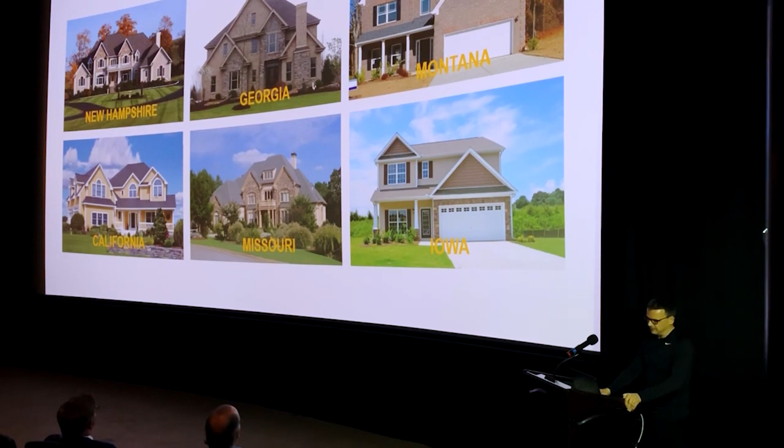So our approach is a bit different from Kenneth Frampton's concept of critical regionalism, which I'm sure a lot of you are familiar with. Critical regionalism arguably looks at context through a geographically pretty broad lens, right?

But we are more interested in the subtle qualities and maybe even idiosyncrasies at the scale of a particular site. It's something that helps us develop an architectural narrative that informs our design process in a quiet, meaningful, and site-specific way.

And tonight I want to show not only pictures of finished projects, but also talk about what inspires us and what guides our creative process when we design our buildings.

What you see here is our first commission, which we called the Camouflage House. Maybe not so subtle a name to describe our conceptual objective here, to make the house assimilate with the landscape and almost disappear in it. We started the design process by documenting colors and textures of the ever-changing foliage of the site, and then transformed them into a compositional palette and template for the building skin.

We collected leaves at the site and used them to build facade study models to start testing the overall aesthetic effects you could achieve, and the idea that you could create a veil for the building that would make it disappear in the context.

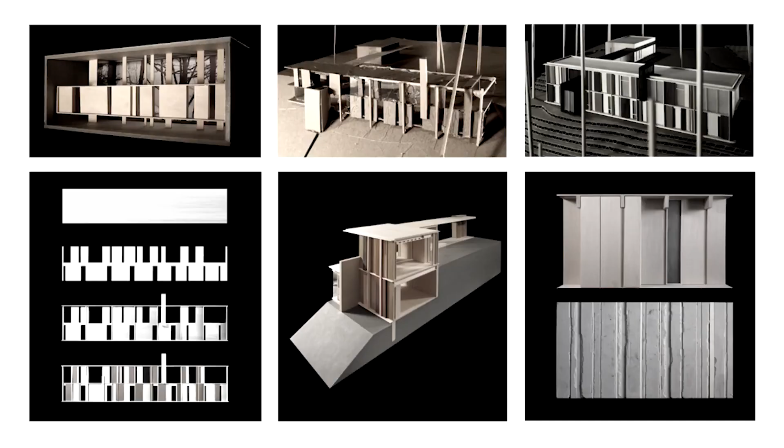One lesson that we learned was the importance of physical analog models at all scales, from highly conceptual artifacts to rip-and-tear study models. You can see here some examples for that particular project, all the way to detailed section models and full-scale mock-ups.

And we found model making to be also an invaluable tool to communicate with our clients, to give them something that is haptic and chronicles our assumptions during the design process and what led us to proposing a certain design.

And so models are really everywhere in our office. Our individual workstations—we are 8 people in my office—each one has a model building station next to it, so there's usually always somebody in the office working on some 3-dimensional object.

The second thing we discovered was the value of architectural diagrams. Diagrams not only to clarify and refine our own design strategies internally, between my partner and I, and then subsequently with people that worked with us, but also to facilitate a more focused discussion with our client about the main ideas driving our design.

So it's not just overwhelming them with pretty images that look awkward to them, but keeping them abreast of what our thought process is.

So let me go through some of our projects to demonstrate how we use models and diagrams as generators for ideas and how the process unfolded in some of these projects.

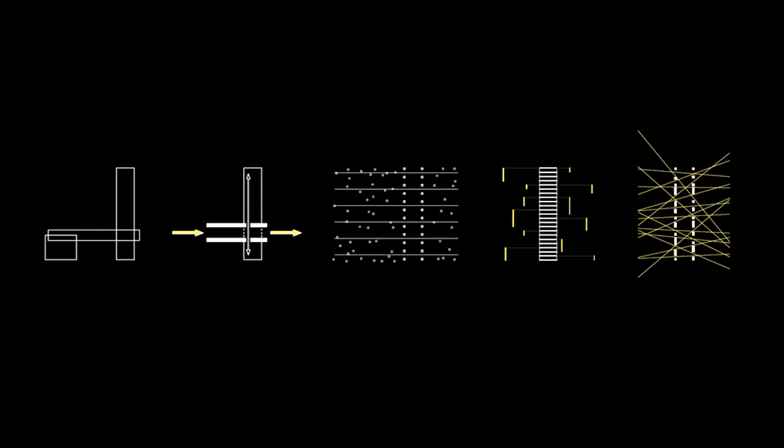For the Topo House, we wanted to explore how a building might merge with the land it occupies, rather than just sitting on it as a self-referential object, right?

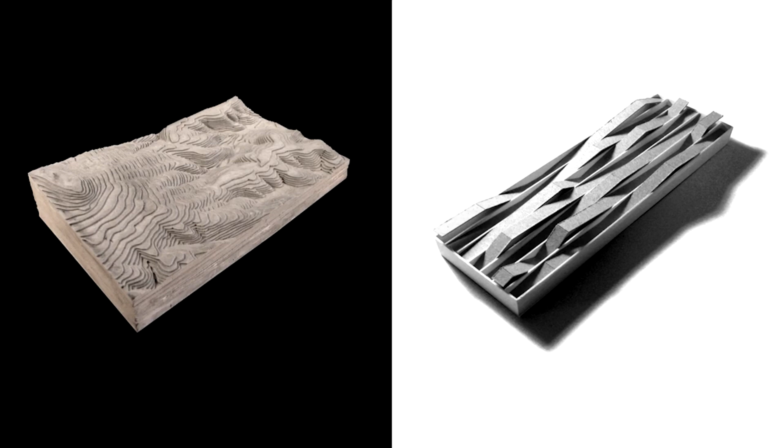The site is located in Wisconsin's so-called driftless region, which is an unglaciated area with softly rolling hills that alternate with tight ravines. And one of our first context models interpreted the distinct experience of moving through this landscape as a series of parallel folding planes. You can see that here on the right.

And we took that model and simplified it into a continuous plane that would peel itself out from the ground, creating formally something like that.

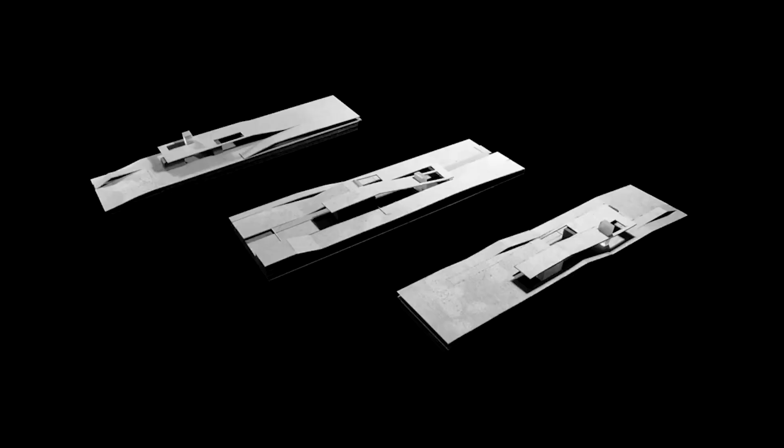And we took that idea and went through a series of rough study models, just really cardboard cut with a knife, that explored possible building forms that could accommodate the given program without getting too hung up on the particularities and exact room sizes of the specific program details.

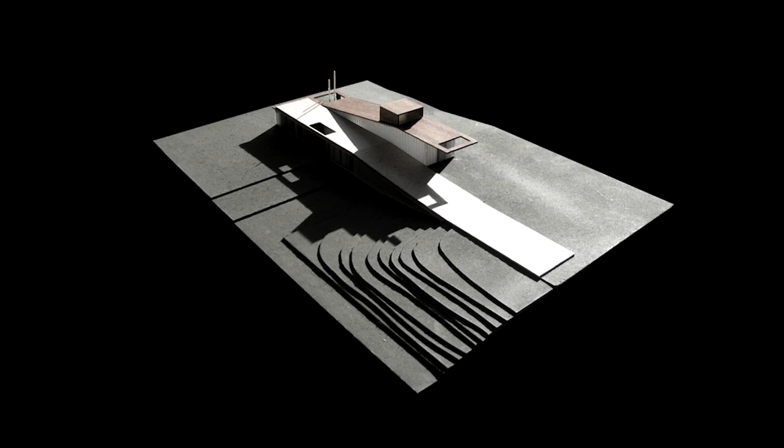At some point, after discarding the more complex forms, we narrowed it down to a volume organized as 2 staggered bars. These 2 bars form a low-slung roof form that extends the grade over to a lower portion of the house and then slowly rises up until it terminates in a long cantilever at the south-facing end of the building.

And then we carved out spaces that became these sheltered outdoor courtyards. We designed that roof band that basically ties these different blocks together, and then added a green carpet—the thing that extends the green prairie land over parts of the house.

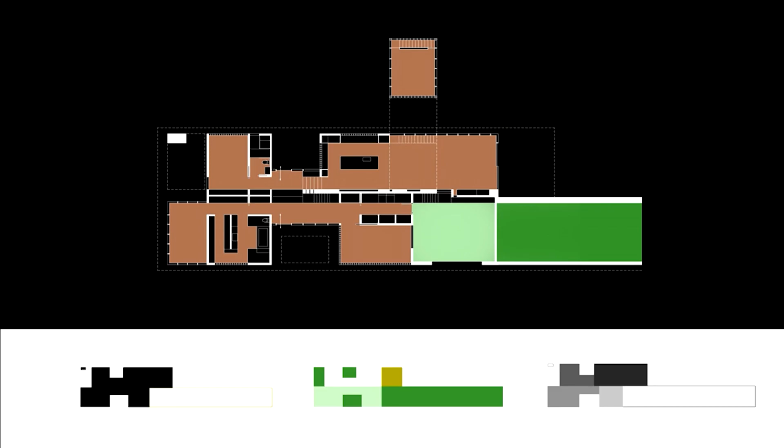The floor plan is really simple. There's basically one central spine that ties together these 4 parts of the house. You come in through this entry courtyard into a vestibule, with a private bedroom here, another bedroom there, and then a main living hall facing south with the big overhang, shown by the dashed line at the end of the building.

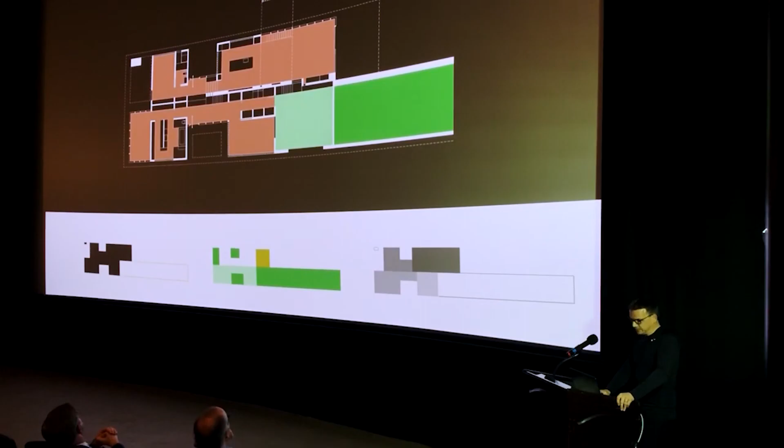In the section model, you can see the different floor elevations in relation to one another on one half of the house. When you approach the house, you see the building literally merging with the grade at one end, then slowly peeling away from the ground and turning into the roof plane that eventually rises further up to the big overhang.

This is a view standing on the lower green roof looking south. You can see on the left where the copper roof plane starts sloping up, and then there's a little observatory popping through the roof plane.

And a view during the winter from the east. So I talked about these voids that we created within the building form—this is that entry courtyard I was talking about.

So you come to the front door. This is the front door here, seen at night. It's a 10-foot wide pivot glass door that opens into that little vestibule.

And then you can see here the first steps that lead up to the next level, if you will—not a full level, but 4 steps or so up to the next floor plate plateau, and then it starts rising up further from there.

And here you are in the kitchen. You can see how those steps, or some other steps here, come down to a lower part. Then when you turn around, you see into the living hall and out into the snowy landscape, as always.

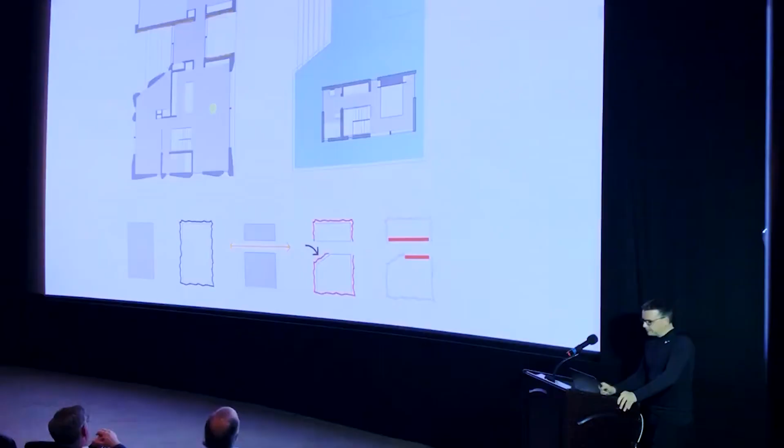We emphasize the entry for the house here by pulling or angling one of the walls in, creating a little entry forecourt with a forced perspective toward the entry door. The plan is again very simple: just a little vestibule and an open living hall, then you go up a set of stairs into a bedroom suite embedded within the green roof of the podium of the house.

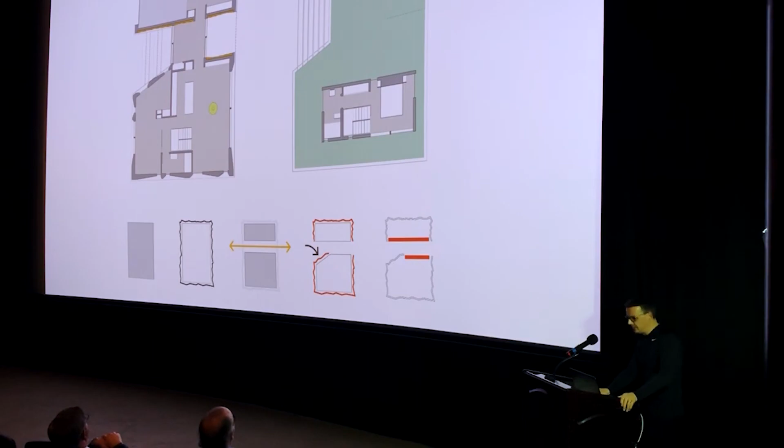This is the view of that entry condition. One side folds in. The other we exposed—or played with the idea of exposure of something else. The skin of the building ends here, and we designed a highly articulated wall of milled and varnished cedar blocks, stacked at slight angles to echo the undulation of the charred wrapper, but at much tighter intervals and in a horizontal way. This wall leads to the entry door and pierces through the building wall. You can see it continues on the inside, and as you walk through, it leads you all the way to the other side of the house with access to a long linear patio along the edge of the woods.

This is a view of the patio, and you see this long retaining wall that double functions as a bench. There's a light fixture built into the underside of this concrete top that emits a soft glow at night. Here's a view back at the house in the evening—you can see the light washing the patio.

Now we have a set of 24-foot wide sliding doors. This is an enormous opening with really cool hardware, very easy to use, and it connects the house—the main space of the house—very generously with that back patio.

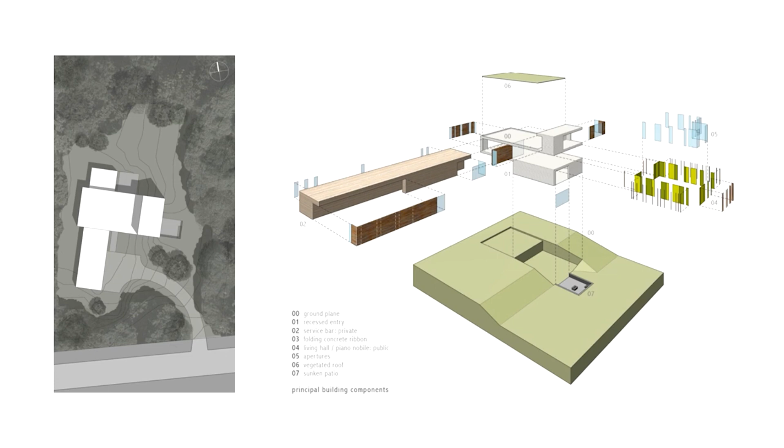We organized the program in two interlocking bars. There's a service bar clad in whitewashed wood, and then a concrete block ribbon that interlocks with it and cradles the main living hall of the house as the social epicenter. That L-shaped configuration allowed us to have a more public forecourt and a private backyard.

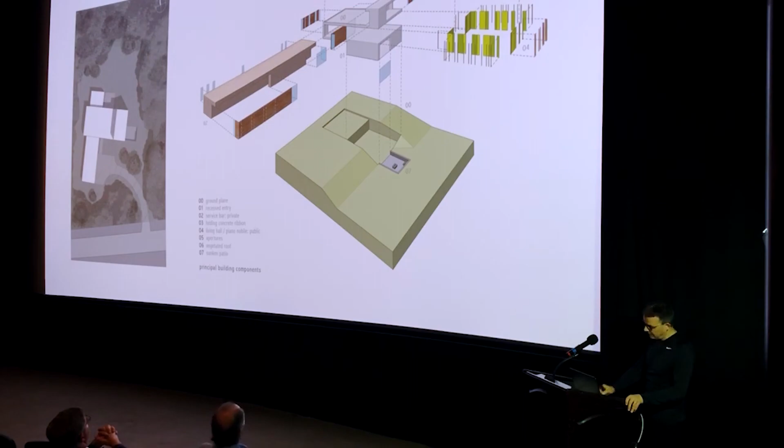That activity hub is really one open space where the owners cook, dine, and lounge together. They hold fundraising events quite frequently, so it needed to be a pretty generously sized space. We wanted to mark that social epicenter of the house with these perimeter wall panels.

We used shades of green to contrast with the rest of the muted colors of the house. It creates this almost piano nobile, if you will—a colorful volume bracketed top and bottom within that white concrete block form, which folds up and creates a sort of observatory on the third floor.

Now, why green? In our discussions with the client, it became clear that one thing they really regretted about living in Wisconsin was the short duration of the summer. So we proposed to use color as an architectural device to infuse the interior year-round with the lush tones of summer's verdant but short-lived greenery.

We used this diagram to illustrate the idea. As Wisconsin's long winter sets in, the lush green turns into gray—this is where we are right now, still—until we artificially reintroduce green to the color palette, like an abstract and maybe cheerful echo of nature's chromatic vibrancy. The idea was that this splash of color would act as a potent antidote against the effects of those long, protracted winter months when the actual apertures of the house frame nothing but somber views into Wisconsin's frozen landscape.

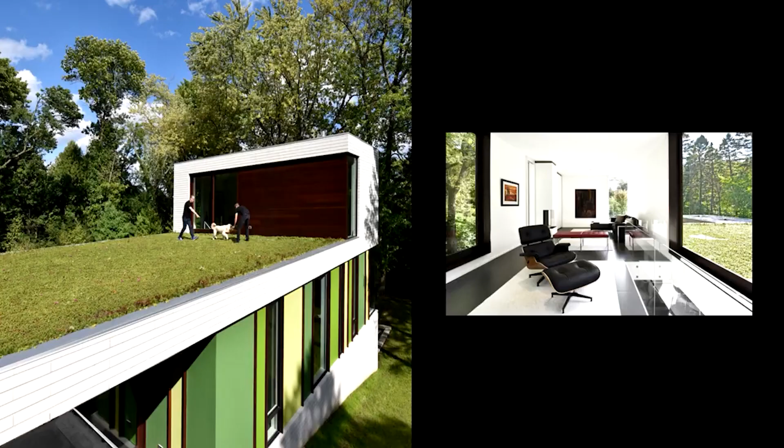There's a staircase that leads up to the small study on the third floor. That study opens up to a green roof, which you can tell does not have any railings. So by code, it's not supposed to be used, but the dog discovered it as its most desirable space in the house. So it has become occupied, and we just hope that nothing will ever happen.

It was funny because at the photo shoot, the photographer attracted the dog, which started running toward the photographer who was standing on the garage. There was a moment where it seemed the dog would just fly off the roof. But it didn't happen. They're smarter than we think.

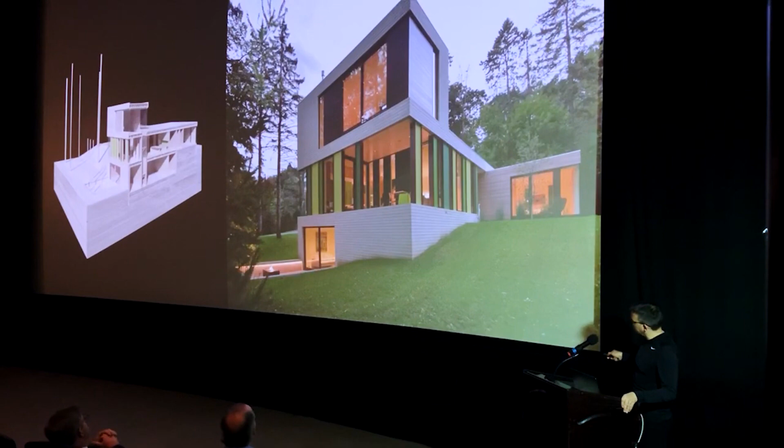And there's a view from the backyard here. This is the master suite, and then you can see here that sunken courtyard with a little fireplace. This is where guests can sleep, and a view from the master bedroom back to the house, with a little private terrace there.

Sometimes projects can be inspired by nothing more than a random encounter at a site visit, which is what happened when we designed a small studio for a country music composer, also in Wisconsin. We came across this old manure spreader that was left behind on an abandoned field across the street from our site. I'm not sure if it was the complementary colors or just the image of this lonely, weathered object or artifact sitting alone in the field, as a sort of memento of the area's agricultural past.

But something intrigued us really about that, and it intuitively seemed like an interesting and fitting precedent for this kind of project - this primitive building in the middle of the countryside.

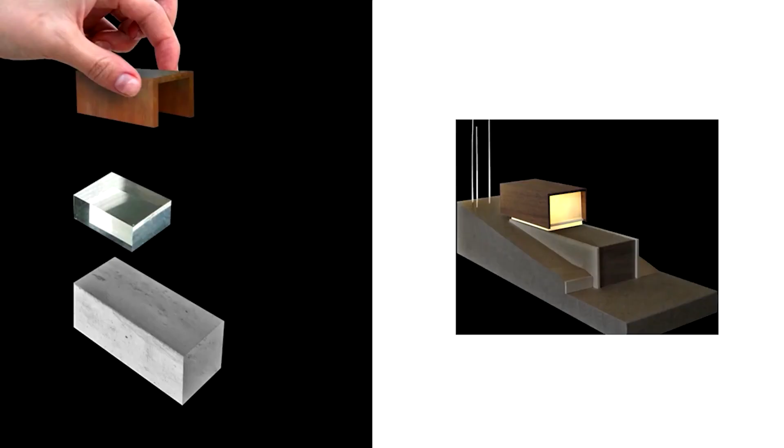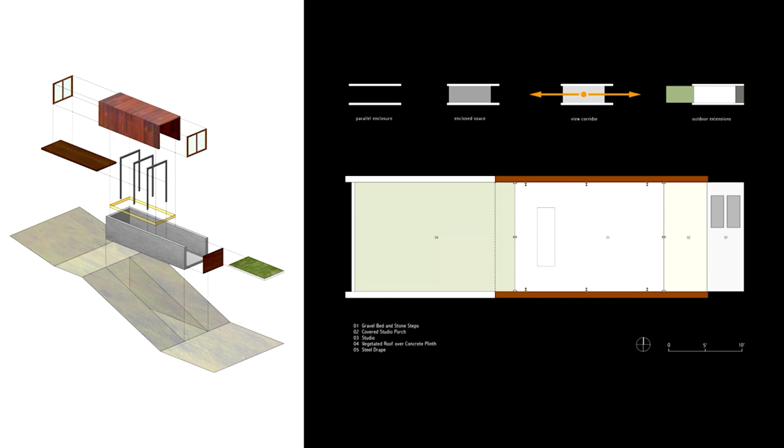So we developed a very simple building volume that consisted of three basic components: a concrete base, the open studio piece itself, and then a steel shroud that laps over that studio space. The concrete podium carves into the slope of the site, and then formally supports that studio space above, and then the long sides of that studio space are covered by the steel shroud that folds over the top.

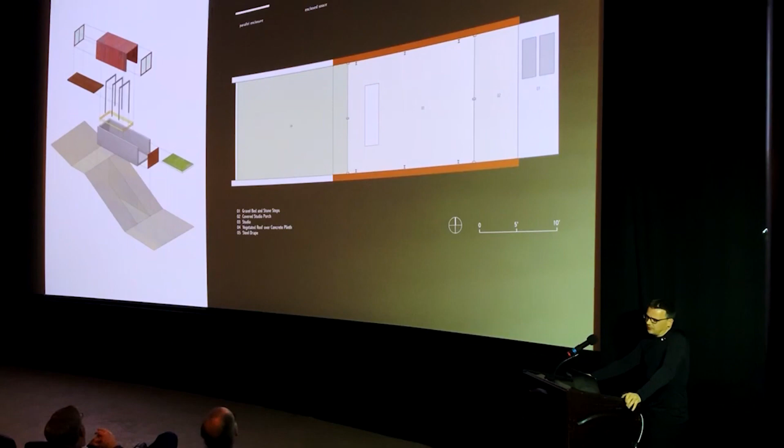And the rusted manure spreader had served as a starting point, and maybe a little bit too literal, but so be it. That idea of weathered steel plate was an obvious and appropriate material to start talking about an enclosure system here.

So instead of cleaning the Cor-Ten steel before installing it, which is best practice, we decided to keep all the alloy imperfections and surface oils and roller marks from the steel mill untreated, to create a really unpredictable and ever-changing veneer that would contrast with the modularity of the cladding and the formal rigor of the building itself.

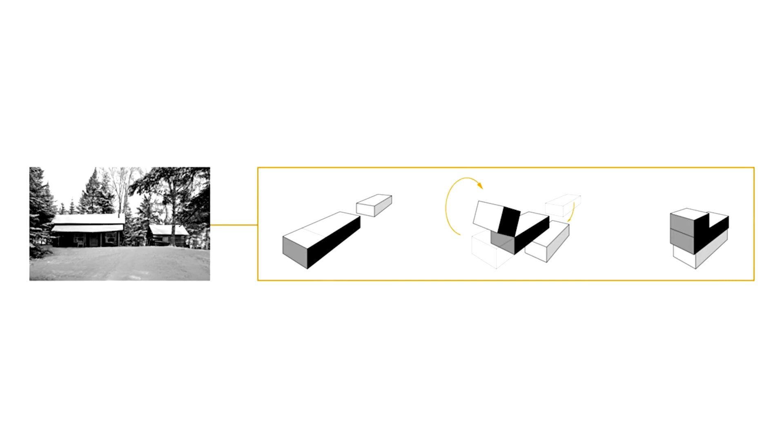One example is a pair of cabins I want to show, the stacked cabin and the linear cabin, in which we both revisited the traditional typology of Wisconsin cabin compounds, which usually consist of an open plan longhouse that houses the communal living spaces, and then an outhouse and a freestanding tool shed.

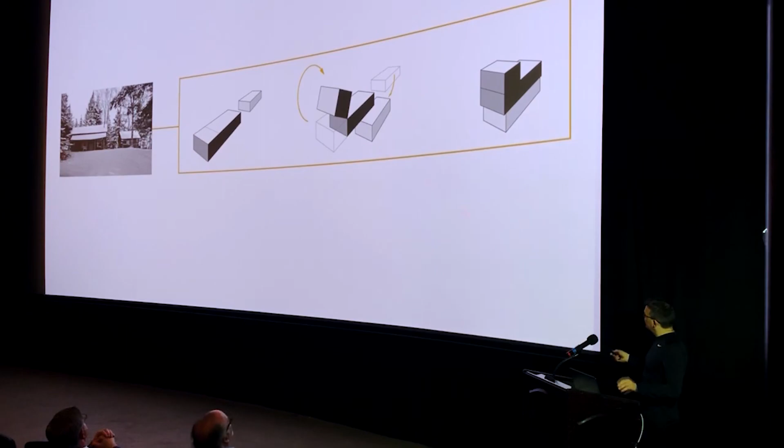For the stacked cabin, we tried to take those components that are usually horizontally organized and stack them vertically, which allowed us to minimize the building's footprint and take advantage of the sloped site and the views into the treetops that a higher vantage would afford. So that's the stacked cabin, a really simple building.

And the linear cabin was designed a few years after that. In this project, we tried to express the program pieces as 3 seemingly autonomous volumes. We started out with a compact mass for the entire program, like in some previous projects, and then pulled pieces apart, a storage component and a living component, and the sleeping component, like the hearth room component and the sleeping component, pulled apart and then unified by a roof plane.

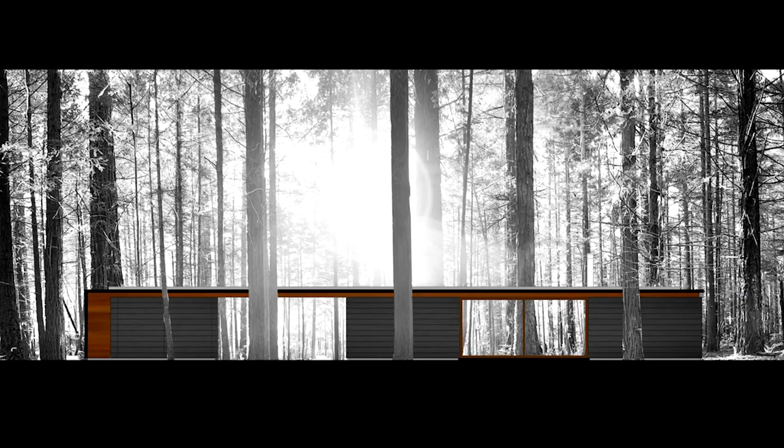So the building appears as a simple bar building when you approach it from the gravel drive that weaves through the forest, and then you look through the voids to the landscape on the other side of the building.

So there are 2 voids. One is this one here, which is really a covered outdoor space that you can use for barbecuing, et cetera, but also to park a car if necessary when the weather is bad. This is the tool shed, but also storage for a canoe and some outdoor equipment.

And then the other void in the building is basically a glass enclosure on 2 sides of that hearth room. There's a galley kitchen here, and then a wood-burning stove in the middle, a little dining space. And then you have access to the 2 sleeping quarters on either side, very small bedrooms. One is a bunk bed room, and the other one is for the parents.

And we cladded that in knotty pine to create a level of rusticity that contrasts with the clarity of the form itself.

Anyway, of course, context is not always pristine and awe-inspiring nature. So I wanted to show this project, which we called the Redaction House, because the surrounding here was much less accommodating than the bucolic and pristine settings that I've shown so far.

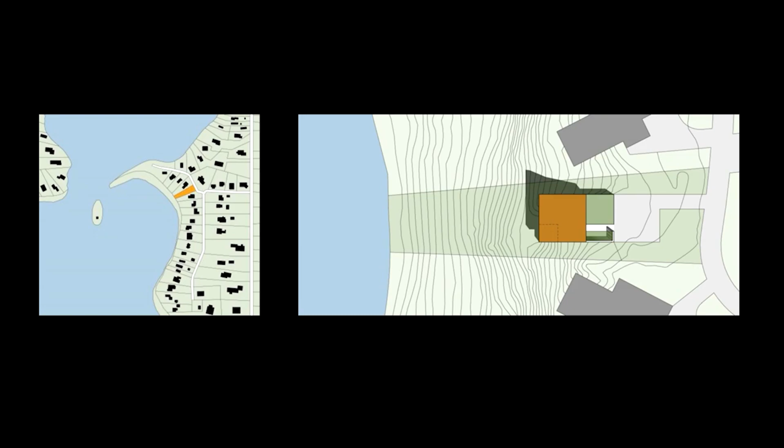The building sits on a tight sliver of land in the Milwaukee suburbs. It's really part of a necklace of decidedly prosaic suburban spec homes that crowd the shoreline. You can kind of see the tight fit here.

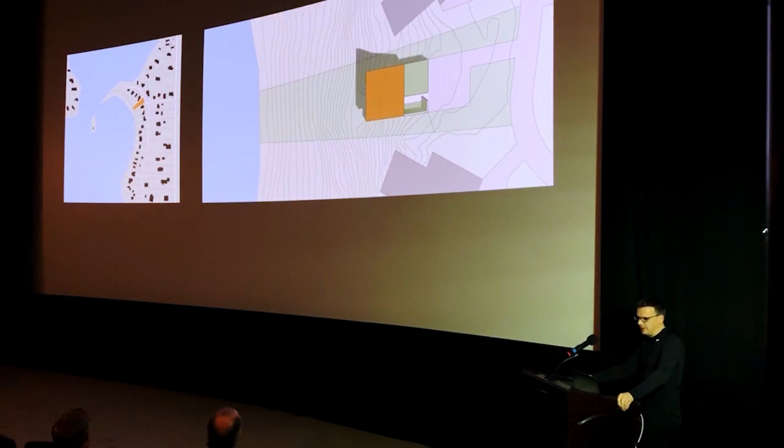The site offered one small view corridor of the lake, right around here. But as you looked sideways or turned around, you would be overwhelmed by the prototypical and uninspired built-up context of suburbia.

So in a way, this project became an exercise in context avoidance, if you will. And it compelled us to design an introvert building that could basically function as an optic filter that would frame the desirable views and block out those that were not that desirable.

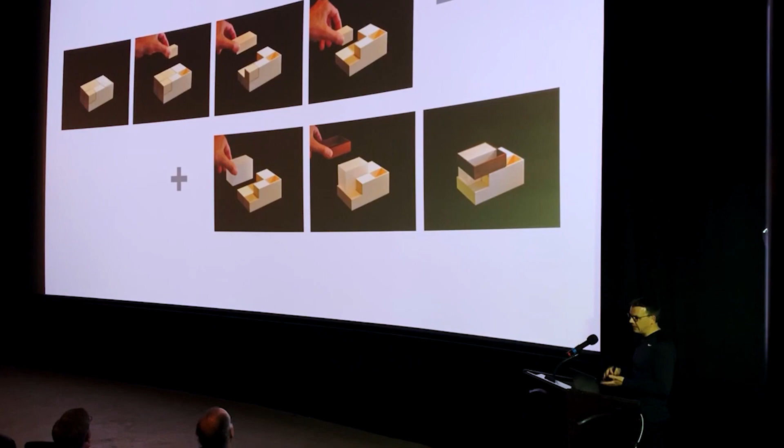The idea of introversion affected the formal evolution of this house, which is based on a series of simple volumetric reductions, and then the bottom row shows subsequent additions to the volume, which led to a sort of fragmented cube with spatial voids that organize the program inside and aid us in that reductionary process.

I made that up, right? That sometimes works, but anyway, we basically ended up with a brick volume that interlocks with a wood cube.

Anyway, this is a pretty cool graphic because you would see these white blocks blocking this out, creating a pattern not unlike what you're seeing here, which basically informed or started the design process for facades, for the compositional palette for that part of the house. That's really unfortunate—it's sort of like a highlight of the whole lecture.

All right, so the next project is one that we just recently completed. This is still a residential project, but I want to change the scale a little bit. It's a 6-unit residential development designed for a vacant urban lot in Oak Park in Sacramento, California.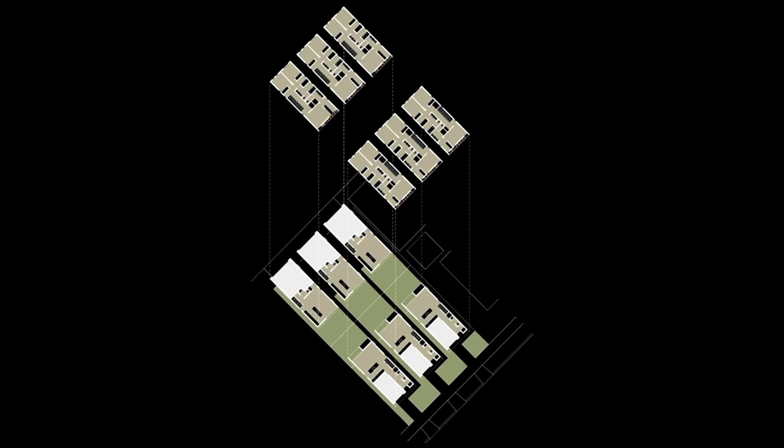This was a spec development, and we had to work with very tight margins, so the design had to be extremely efficient and simple. We organized the units as a compact cluster of 6 individual 2-story homes that mirror the massing and scale of the area's existing building stock around.

Each building is articulated as a plinth with a complementary volume that starts at the back and then wraps over and cantilevers over the front to create a sheltered entry condition.

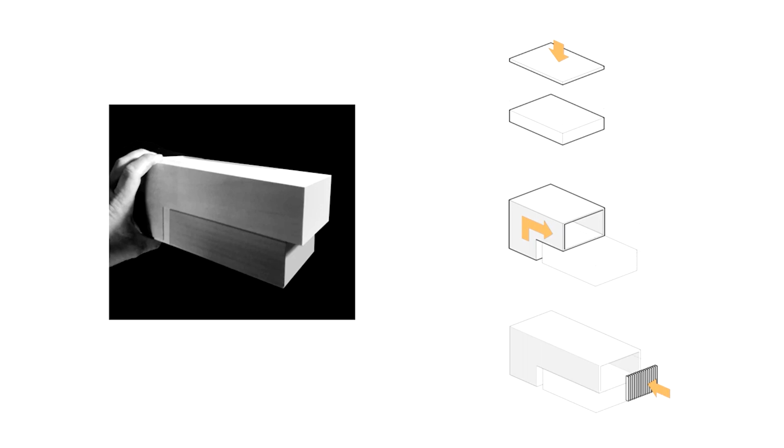We realized really early on that the cantilever and the visible face of that cantilever was really going to be the principal facade for each of these buildings, because budget was tight and we knew that we had to allocate our resources very carefully.

But let me take a step back. Like so many other urban neighborhoods in cities around America, Oak Park for decades experienced the effects of urban flight and economic disinvestment, and only in recent years has been rediscovered by students, young professionals, and artists as an affordable community close to downtown Sacramento.

I know that sounds like just the classic gentrification process, but it's a little more subtle there, a little more honest in a way. I think it hasn't really created an influx of high luxury condos, but it is happening at a moderate level, and it is good for the community.

It's very diverse, both economically and racially, and the idea or the effect of people moving back to the neighborhoods, of redeveloping even existing homes, is quite healthy there.

Anyway, with the influx of new people came small art galleries, independent coffee shops, family businesses that are now starting to fill abandoned storefronts, and so on and so forth. And then there's a whole scene of large-scale murals that have transformed drab warehouses, some of them vacant, into multicolored canvases, and old houses in the neighborhood being repainted in bright colors.

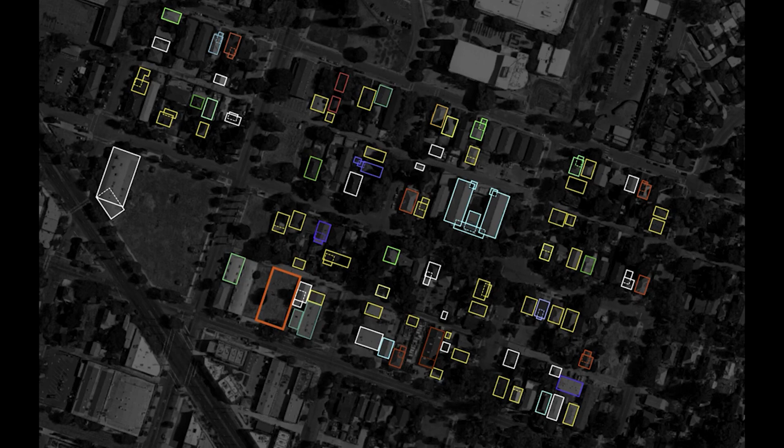This intrigued us right away, and so it happened that color became here an obsession. You will see, maybe not with some of these projects I'm showing here, but when you look at some of our other work on our website, color has become an important element in our design process, because we feel it is an easy tool, an easy application to create a reference to a site, and is also very cost effective.

So we have now studied color theory quite a bit to see how we can apply some of these rules into our own design. When we first visited the site, we drew a color-coded map of the surrounding buildings, and made this large collage in which we paired pictures of surrounding homes with vertical color bars that we felt best complemented the respective paint schemes of the buildings.

And these vertical bars actually reminded us of color pencils in a box, right? Which in turn became the inspiration for the main and defining element of the home: that south-facing facade of the cantilever. When we took these pencils and spaced them out a little bit, we realized it really started looking like a template for something like a screen wall—basically a series of vertical facade louvers that together could serve as a brise-soleil and also give the building an immediate recognizable identity. And this is exactly what we ended up doing.

The front facade of that cantilever basically frames an infill of colored aluminum louvers with prismatic colors that juxtapose the home's otherwise muted and straightforward material palette.

Here's a view in the evening, and you can see how the building turns into a sort of playful addition along the street. And a view during the day. Close-up view of the facade louvers.

It was actually interesting—we detailed this completely different, and it became a cost issue, as so much good ideas seem to cost money. But we were fortunate enough: there is still a car repair shop a block away, and they ended up fabricating these. They bent sheet metal and painted them in their paint shop on site, for a fraction of the cost compared to how we originally had detailed these as extruded aluminum custom profiles.

All right, I know that I'm 50 minutes in here, and I know that Nate is going to kill me if I run late here. So there's one more project I'm going to show, and I'll let you go.

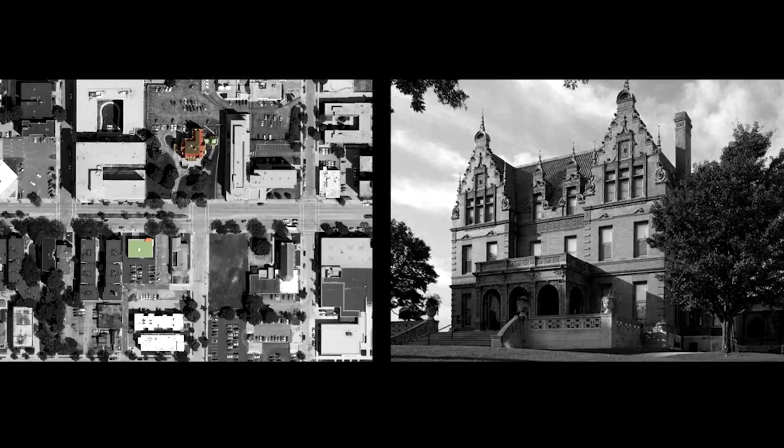Pabst doesn't exist anymore, but there's an organization that runs the historic Pabst Mansion House Museum, a fantastic 37-room villa that Frederick Pabst, the founder of Pabst Brewing, built for himself in the early 1890s. That organization asked us to design the visitor center and archives for the museum. The Pabst Mansion is one of the most frequented house museums in North America. If you're ever in Milwaukee, not only stop by our office, but you should really go there, because if you have any interest in architecture, this is an incredible building.

In today's dollars, it cost $60 million to build. Maybe that's not a lot in Dallas today with the oil money, but it's a lot of money within the confines of Wisconsin.

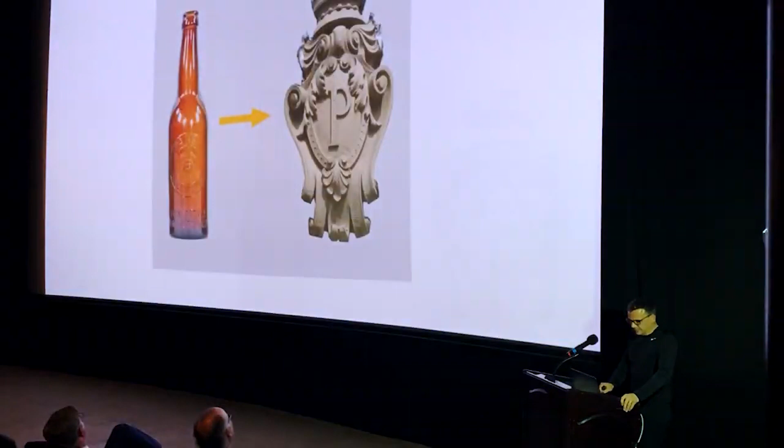Just a little side topic here. One thing that amazed us when we started our research for the project was this: the sale of beer could actually yield enough money for someone to build himself a castle-like building, at the scale that only nobility would have been able to afford in 19th century Europe, which is the time this was built. We actually looked at the overall profit of the Pabst Brewing Company in 1890 to calculate how much profit they made per bottle.

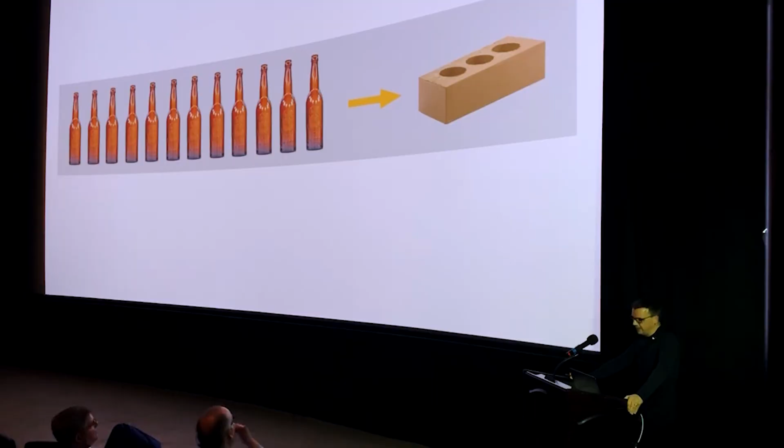Which was 0.27 cents. That is calculated by using the overall volume that they brewed, and then dividing it by the content of one bottle. Because a lot of the beer was, of course, tapped in buildings like the tied house that our office is in. We then researched the average cost of one brick during the same time, and calculated it took the equivalent of selling 12 bottles of beer to pay for one brick, which was 3.25 cents. And when you look at the mansion and those gigantic solid walls of brick, you can only imagine the amount of beer that must have been consumed to finance that place.

This all has nothing to do with the project, by the way. I just thought I would share that with you, because we spent a lot of time on the math, if you can imagine.

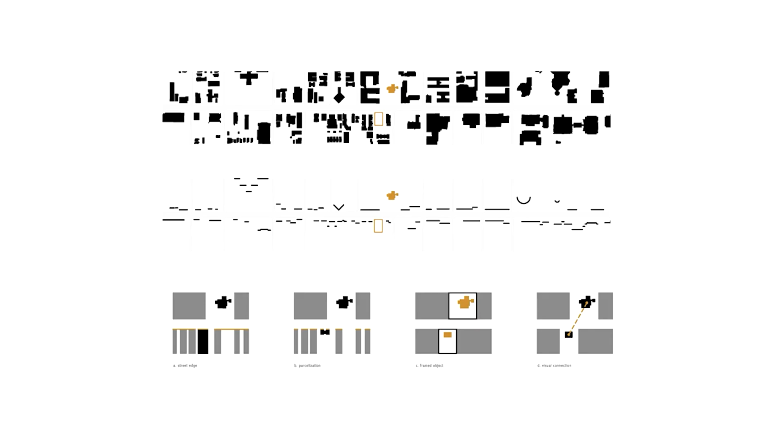Anyway, this is the mansion, and it used to be part of a necklace of grand mansions built by the industrial captains of the time. This is actually Wisconsin Avenue now. It was called Grand Avenue and goes all the way to the lake through downtown. This is really the only mansion left. It was going to be destroyed in 1970, but then was bought by the organization to save it.

Marquette University is right around here. You can kind of see, just like the Nolli plan of the area shows, these solid footprints of the buildings encroaching on this site. Now it looks tiny, right? It was still a big Pabst mansion. But the funny thing is, the site did not really provide enough space for that visitor center without encroaching on the view of the building itself.

So the organization bought this lot here across the street. But it's not only not on the site, it's also not right across the street — it's sort of on an angle. And I think one of the struggles we had was to figure out a way these two buildings could actually relate, so people would understand to go to this building and start their tour here, and then their guide would walk them over to the mansion.

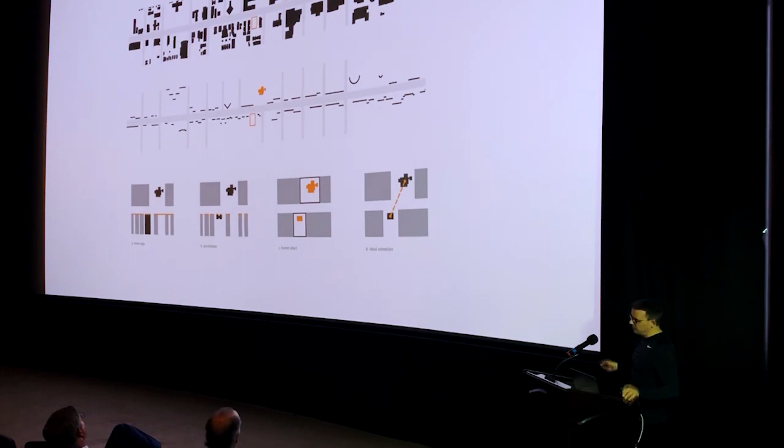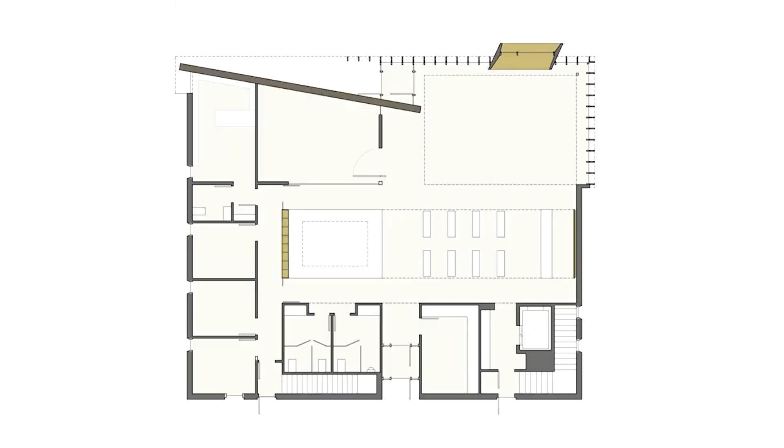So this is really just basically a square building with one wall that sort of angles toward the entry vestibule here and leads you into an open space that can be used for visitors to congregate before their tour starts, but also for events like weddings and so on and so forth.

And then there's a little store here. Actually, these are all going to be fixtures that can be moved out to make a larger event space, and a little exhibit space over here, offices and back of house stuff there.

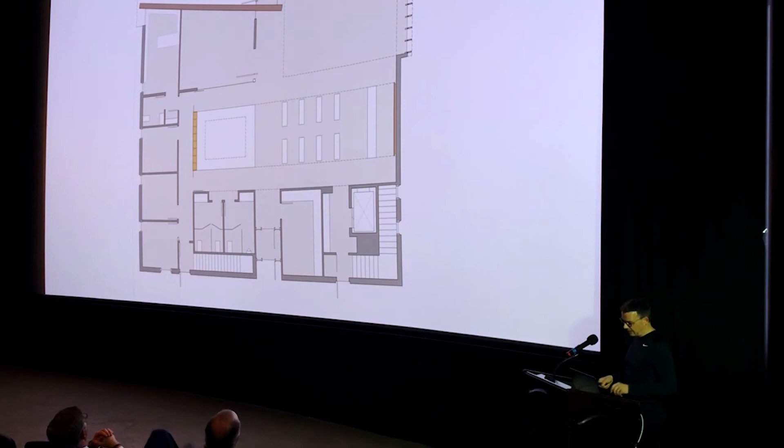And then there's actually a whole classroom cluster in the basement. But the basement is mainly occupied by the archives, which you can see from the main level by looking into this atrium down, and you will see there the archivists working through their materials and sorting things and so on. Again, just the massing, very simple here.

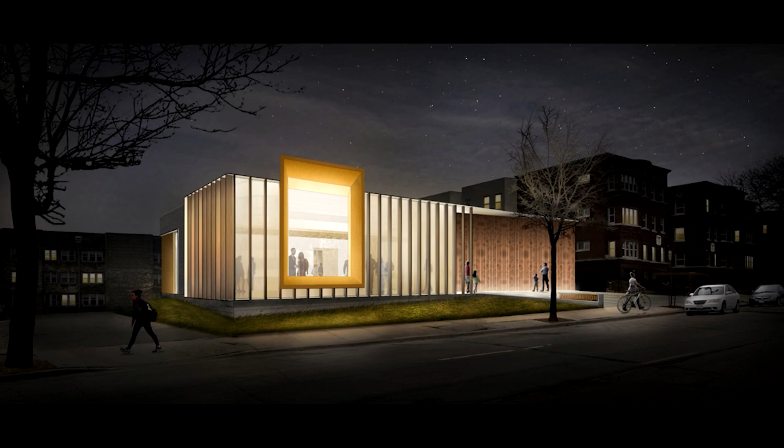You see here that angled wall that sort of opens up the entry and a view from the street, from across the street.

This is all going to be clad in polycarbonate glazing, triple wall system that actually has a very good R value compared to glass. And then, sort of complemented by these very tall vertical fins that give the building a sense of monumentality that we feel befits its purpose in relationship and dialogue with that grand monumental mansion across the street.

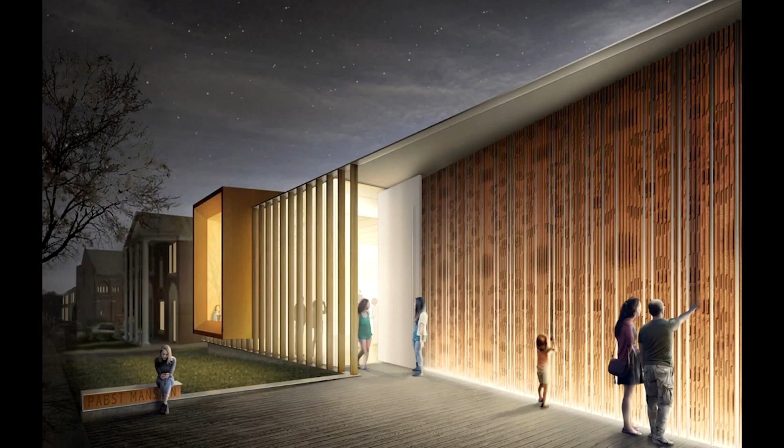And so you will enter along this terracotta colored textured concrete wall that leads to the main door, and this really became the one element where we try to find, where we're trying to integrate some clue to its relationship, architectural relationship with the mansion across the street.

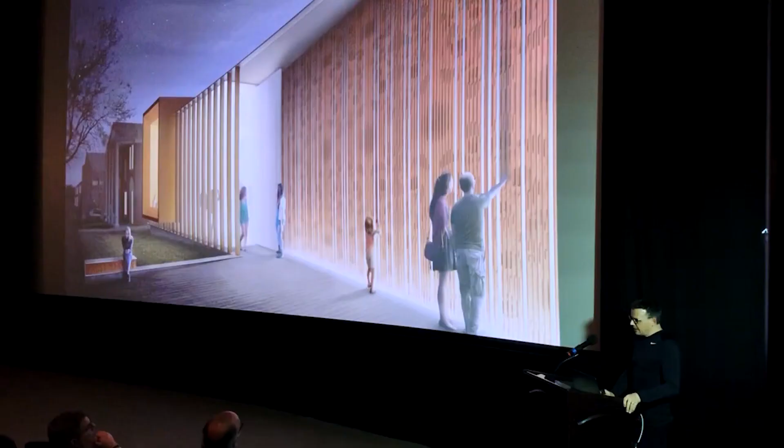And we wanted to avoid any kind of historicism, but we thought it would be interesting and appropriate to work into the building some decorative element borrowed from the mansion, something that would inherently feel familiar to the visitors of the mansion without being literal about it.

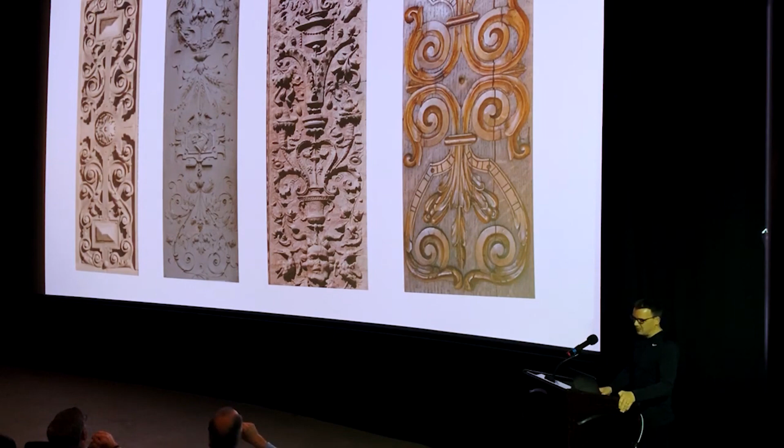So we cataloged the patterns of terracotta and carved wood and carved stone around the mansion to find something that we could use, as a template for formwork for the concrete entry wall.

And we ended up selecting a stone column at the mansion's portico, which we mapped with the help of digital stereophotogrammetry, which is really fascinating because you go around, basically take photos, and then there's this pretty sophisticated software that stitches it together and builds automatically a three-dimensional model of the pattern that you can work off of and use for fabrication as well.

So, we stole a selected piece of pattern at the mansion, and then idealized it into something that worked with the scale of our wall panels. And then we added vertical grooves into the formwork to create an additional textural layer.

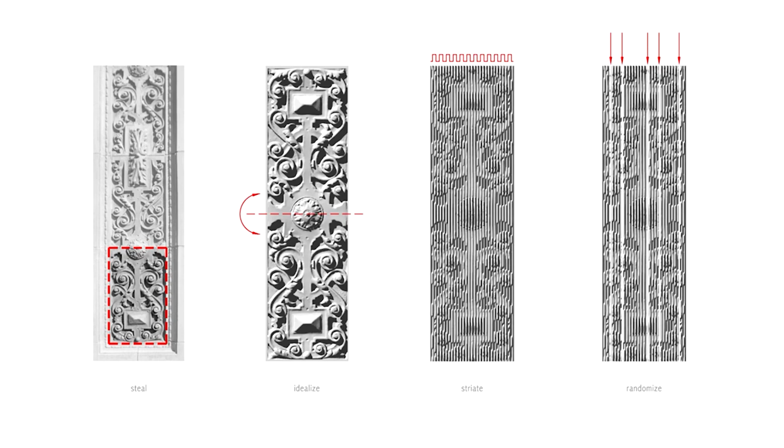That would enhance the tactile qualities of this wall. And then we randomly filled some of these reveals in with metal rods that would further animate the plane.

In addition to the open space for the visitors, the building also had to accommodate the archives I mentioned before, and the collection is quite astounding. They not only have the full corporate files of the Pabst Brewing Company, but just a random array of artifacts and things and advertisements that relate to the brewing company.

And all this really reminded us of these Renaissance depictions of those famous cabinets of curiosities, those wild encyclopedic collections of random stuff.

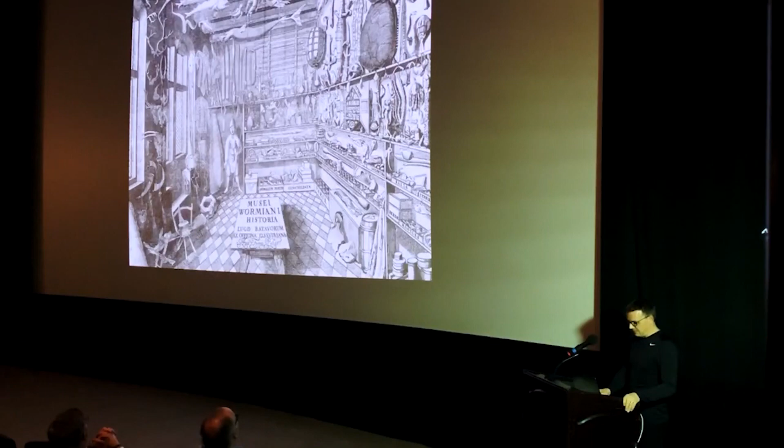And our goal was to keep some of that creative chaos that we really liked in the existing warehouse where they work out of right now, and make it visible to the visitors of the new building, but obviously presenting it in a more rational, more orderly framework.

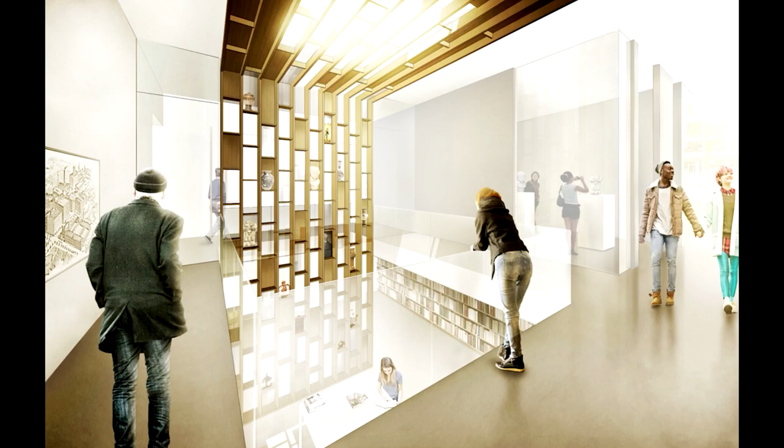So we designed a wooden ceiling band that runs from the gift shop, over here, and overhead to that atrium. You see here the archivist working, looking down, and then creating this really modular shelving system, or a version of a cabinet of curiosities in which random artifacts can be placed: beer steins, busts of Frederick Pabst, old bottles, company artifacts.

And I know I'm at an hour now, so I'll wrap up with this last slide. Maybe a good segue into the happy hour that Nate was mentioning, but stay sober, right? But thank you anyway.

Happy to take questions. I don't know if you have time left or not. Okay, yeah. No questions. Everybody's thirsty. Yeah. All right.